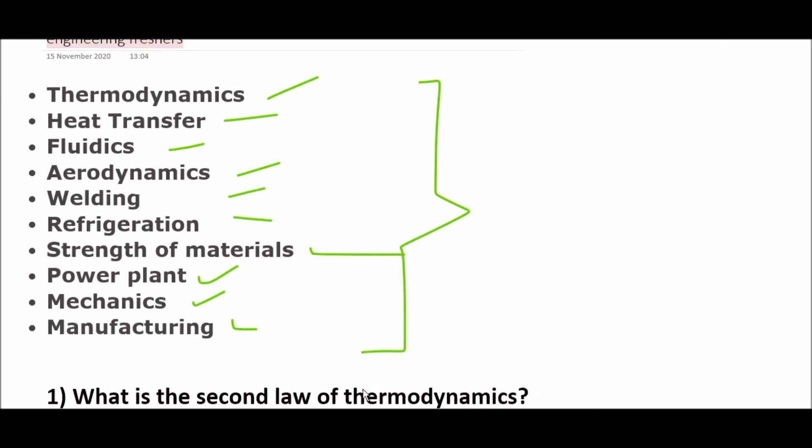First question: What is the second law of thermodynamics? The second law of thermodynamics depicts that the total entropy of an isolated system can never reduce over time.

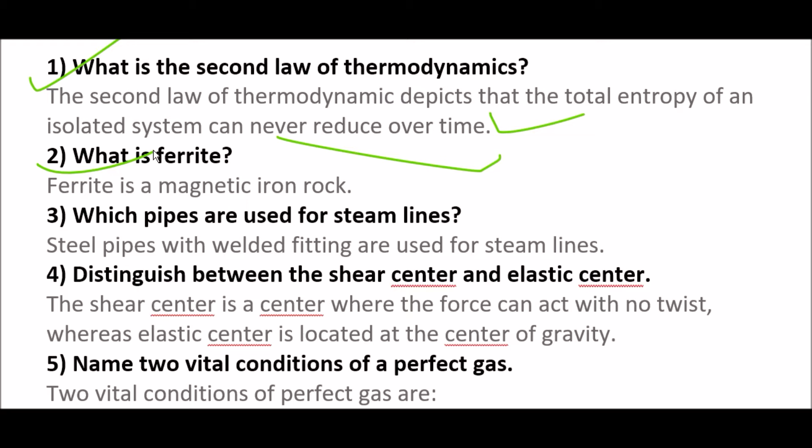Next question: What is ferrite? Ferrite is a magnetic iron rock. It's a ceramic-like material with magnetic properties that are useful in many types of electronic devices. Ferrites are hard, brittle, iron-containing, and generally gray or black, and are polycrystalline, that is, made up of a large number of small crystals. They are composed of iron oxide and one or more other metals in chemical combination.

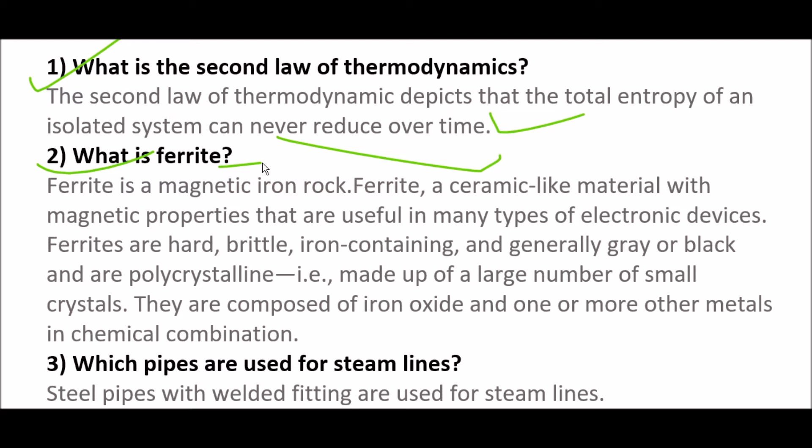Next question: Which pipes are used for steam lines? Steel pipes with welded fittings are used for steam lines.

Next, distinguish between the shear center and elastic center. This is a very important question. The shear center is a center where the force can act with no twist, whereas the elastic center is located at the center of gravity.

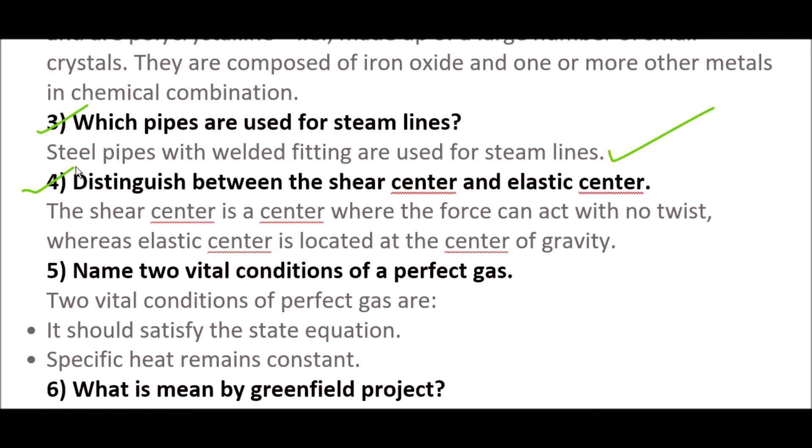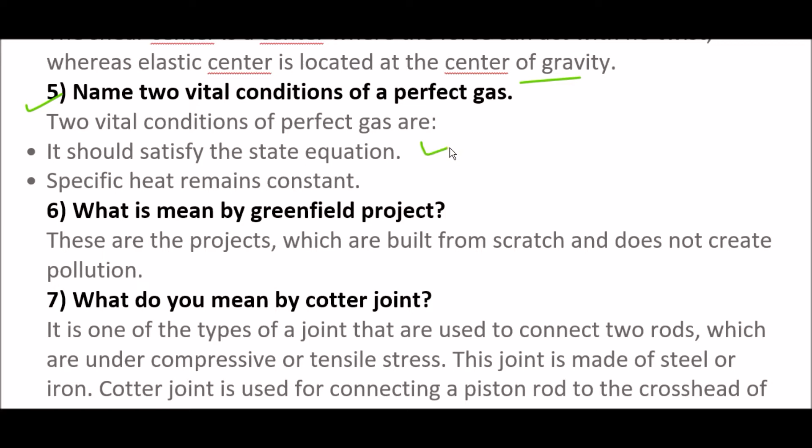Next question: Name two vital conditions of a perfect gas. The two vital conditions of a perfect gas are: first, it should satisfy the state equation, and second, specific heat remains constant.

Next question: What do you mean by greenfield project? These are the projects which are built from scratch and do not create pollution.

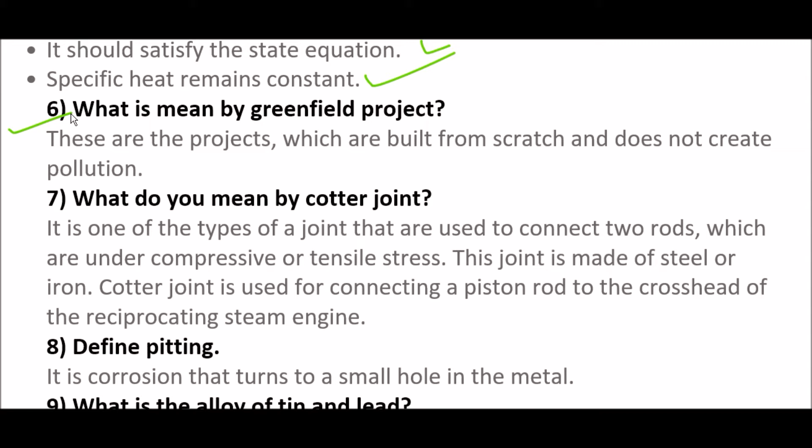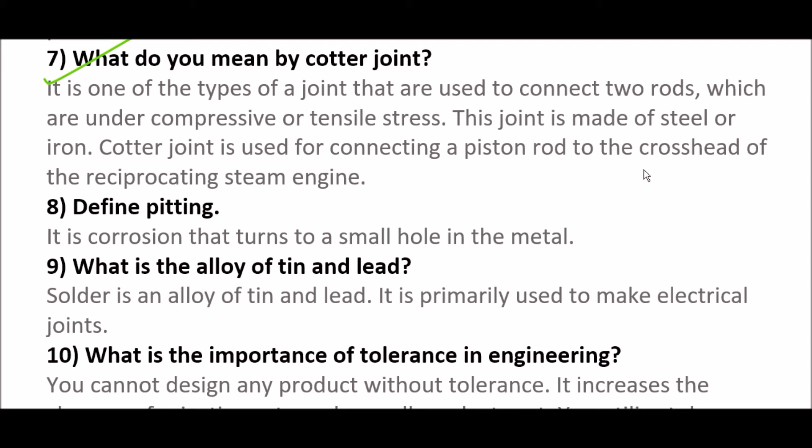Next question: What do you mean by cotter joint? A cotter joint is one of the types of joint that are used to connect two rods which are under compressive or tensile stress. This joint is made up of steel or iron. The cotter joint is used for connecting a piston rod to the crosshead of a reciprocating steam engine.

Next question: Define pitting. Pitting is a corrosion that turns into a small hole in the metal.

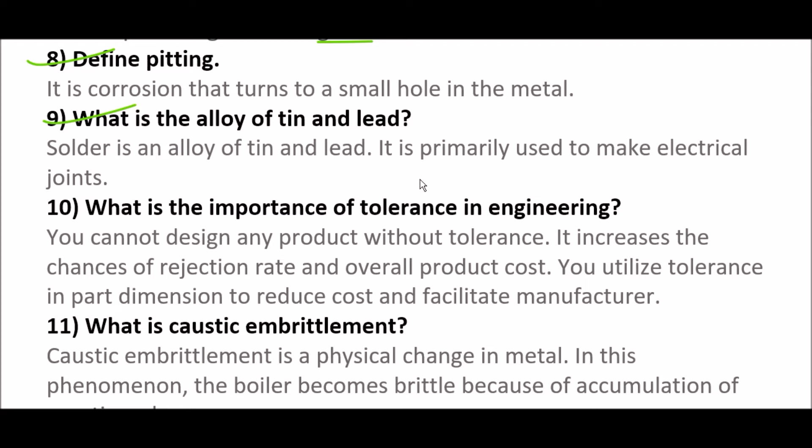Next, what is the alloy of tin and lead? Solder is an alloy of tin and lead, and it's primarily used to make electrical joints.

Next question: What is the importance of tolerance in engineering? You cannot design any product without tolerance. It increases the chances of rejection rate and overall product cost. You utilize tolerance and part dimensions to reduce cost and facilitate manufacturing.

Next question: What is caustic embrittlement? Caustic embrittlement is a physical change in metal. In this phenomena, the boiler becomes brittle because of accumulation of caustic soda.

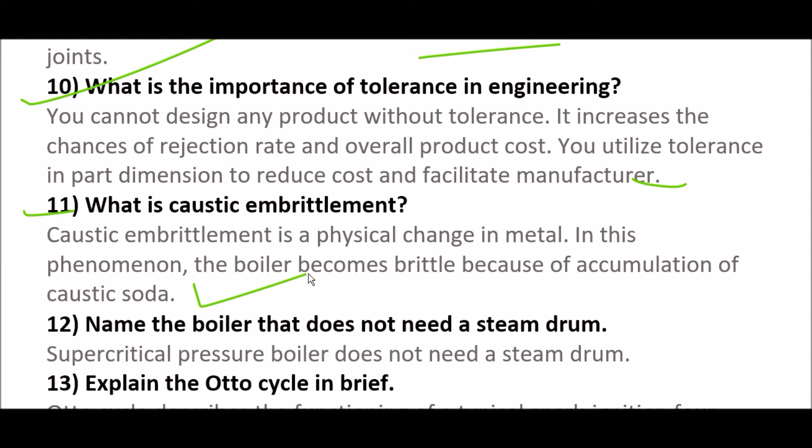Next question: Name the boiler that does not need a steam drum. The supercritical pressure boiler does not need a steam drum.

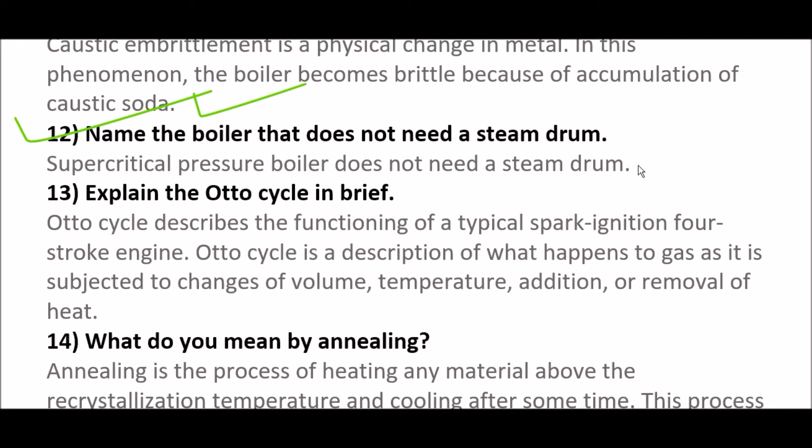Next question: Explain the Otto cycle in brief. The Otto cycle describes the functioning of a typical spark ignition four-stroke engine. The Otto cycle is a description of what happens to gas as it is subjected to change of volume, temperature, and addition or removal of heat.

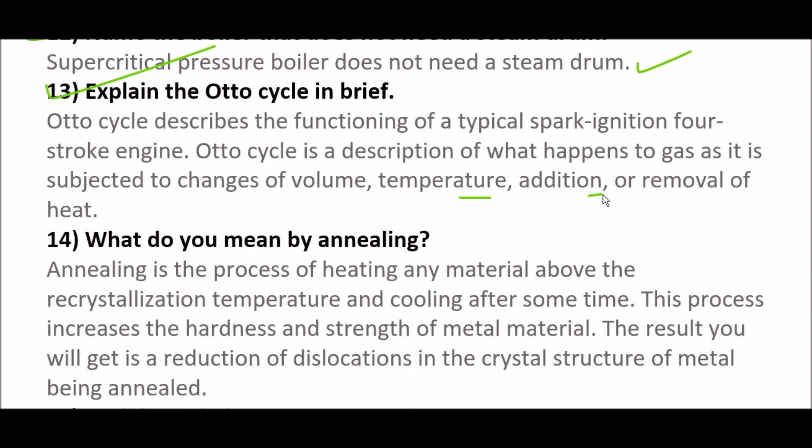Next question: What do you mean by annealing?

Annealing is the process of heating any material above the recrystallization temperature and cooling after some time. This process increases the hardness and strength of metal materials. The result you will get is a reduction of the dislocations in the crystal structure of the metal being annealed.

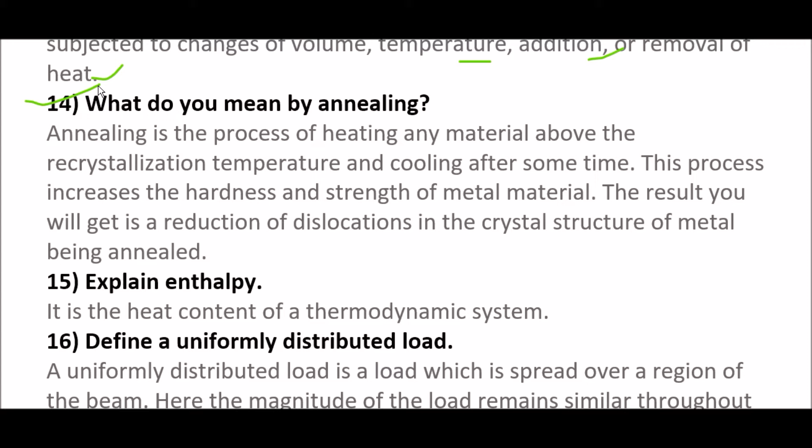Next question, explain enthalpy. This is a very important question. Enthalpy is asked a lot in MCQs and interviews too. So the answer is, it is the heat content of a thermodynamic system.

Next question, define a uniformly distributed load. The answer is a uniformly distributed load is a load which is spread over a region of the beam. Here, the magnitude of the load remains similar throughout the element.

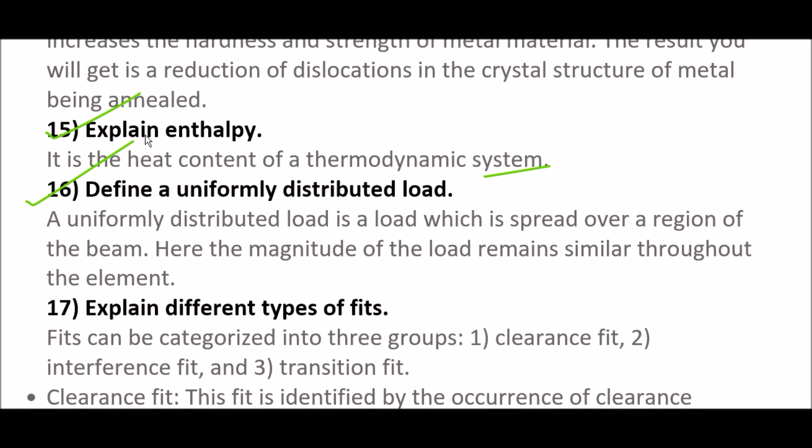Next question, explain different types of fits. The answer is fit can be categorized into three groups: first clearance fit, second interference fit, and third transition fit. Firstly, talking about clearance fit, clearance fit is identified by the occurrence of clearance between the two similar parts.

Next, interference fit. In this fit, the size of the mating parts is predefined to cause interference between these parts. Here, the hole tolerance zone is completely below the shaft tolerance zone. Third is transition fit, which is a compromise between clearance and interference fit. In this case, the tolerance zone of the shaft and hole overlaps.

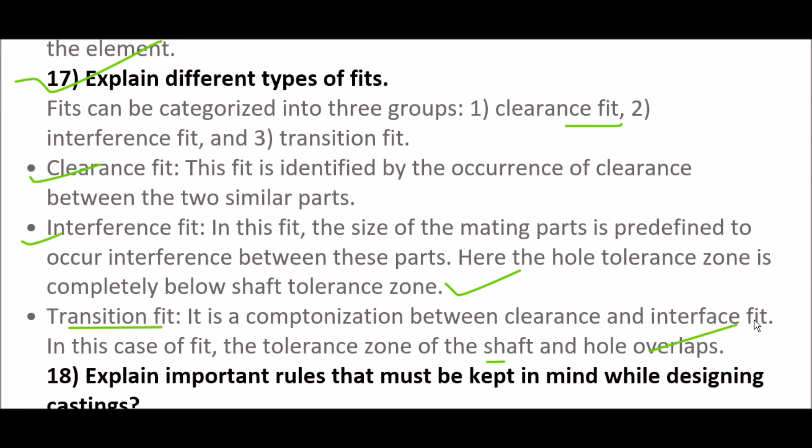Next question, explain important rules that must be kept in mind while designing castings. Following are the points you should keep in mind: first, keep section thickness uniform as much as possible. Second, sudden change in thickness should be averted at all costs. Third, design casting by keeping simplicity. Next, avoid large flat surfaces as too large spaces are difficult to create. And last, use a curved shape to improve the stress handling of the cast.

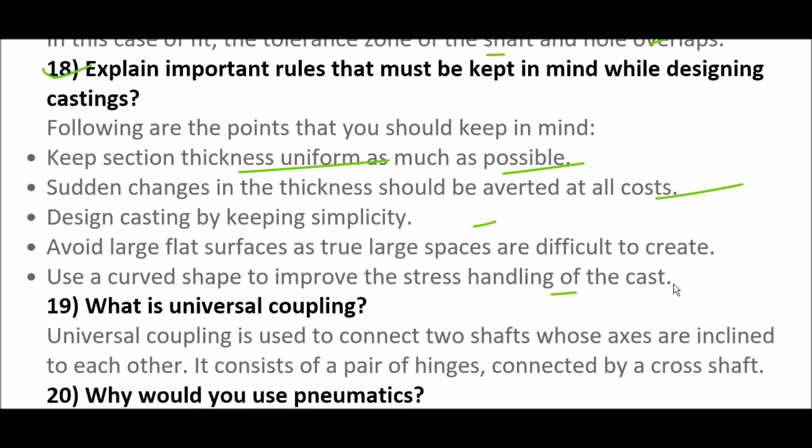Next question, what is universal coupling? The answer is universal coupling is used to connect two shafts whose axes are inclined to each other. It consists of a pair of hinges connected by a cross shaft.

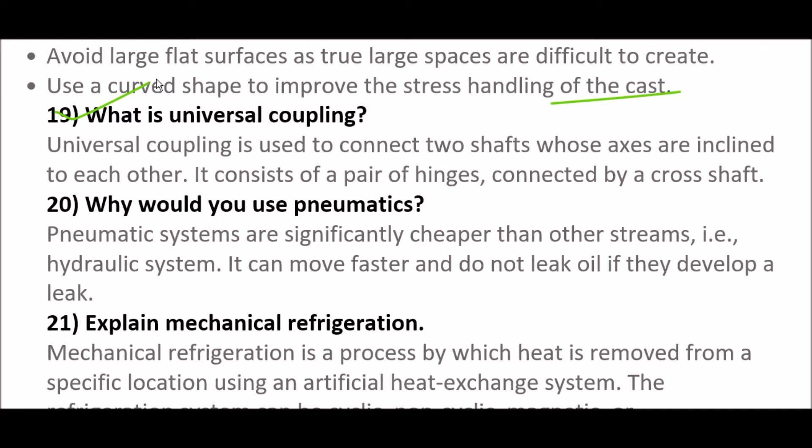Next question, why should you use pneumatics? The answer is pneumatic systems are significantly cheaper than other systems, such as hydraulic systems. They can move faster and don't leak oil if they develop a leak.

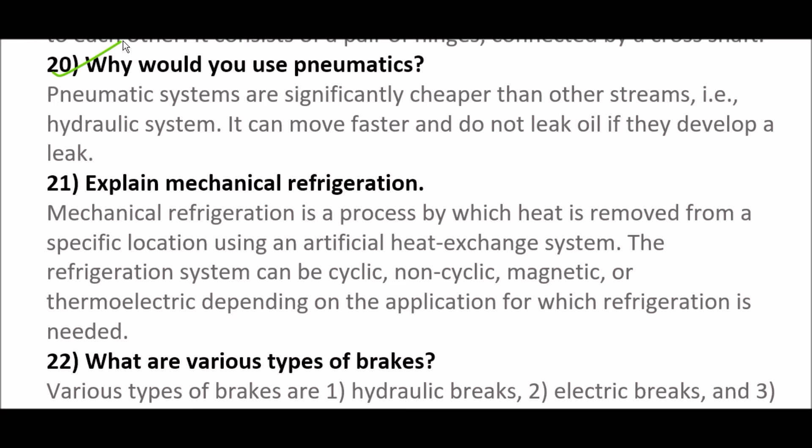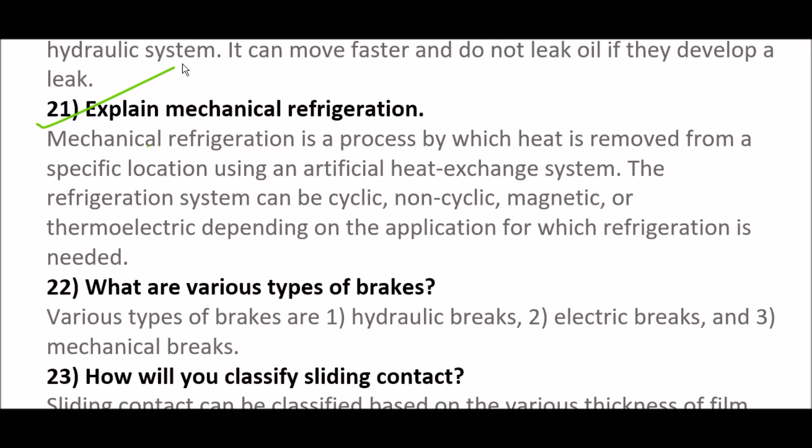Next question, explain mechanical refrigeration. The answer is mechanical refrigeration is a process by which heat is removed from a specific location using an artificial heat exchange system. The refrigeration system can be cyclic, non-cyclic, magnetic, or thermoelectric depending on the application for which refrigeration is needed.

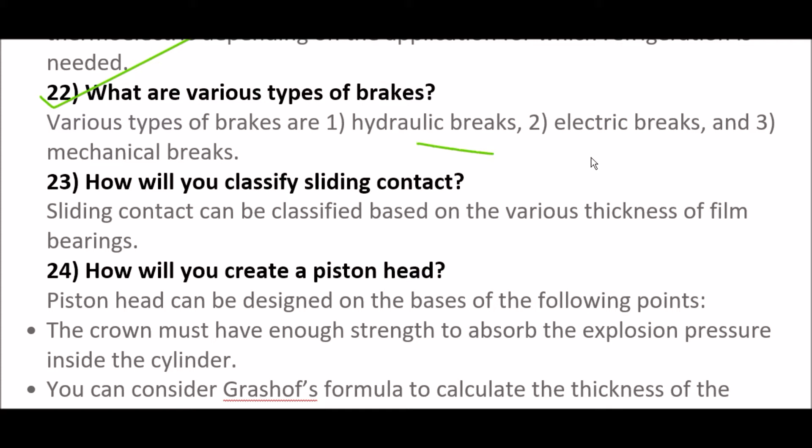Next question, what are various types of brakes? The various types of brakes are hydraulic brakes, electric brakes, and mechanical brakes.

Next question, how will you classify sliding contact? The answer is sliding contact can be classified based on the various thickness of film bearings.

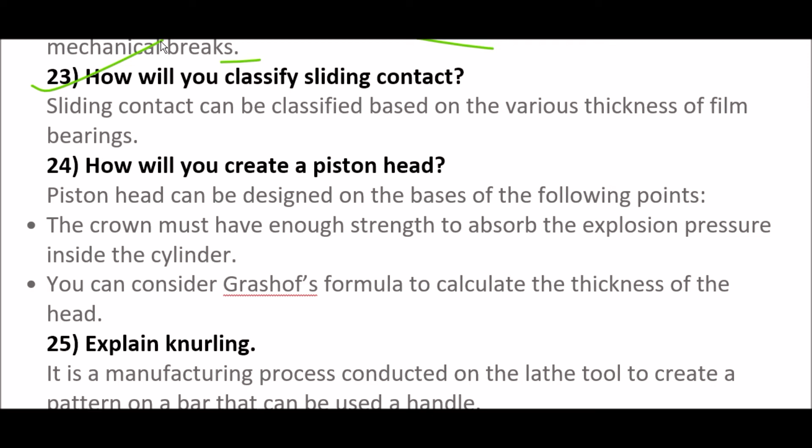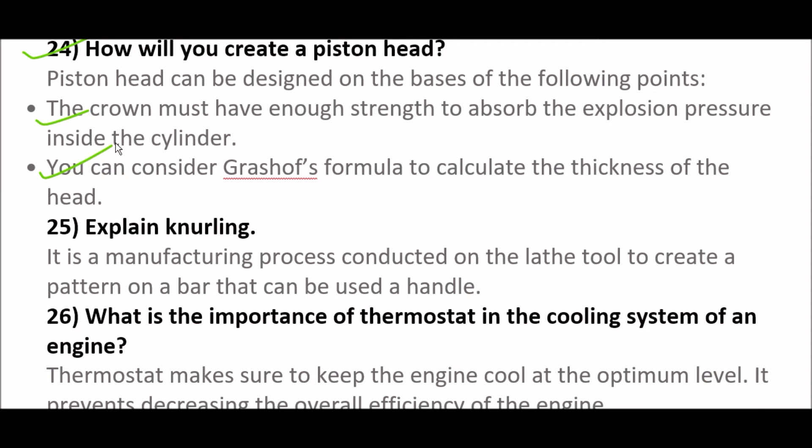Next question, how will you design a piston head? The answer is the piston head can be designed on the basis of the following points: first, the crown must have enough strength to absorb the explosion pressure inside the cylinder. Second, you can consider Grashof's formula to calculate the thickness of the head.

Next question, explain knurling. The answer is knurling is a manufacturing process conducted on the lathe tool to create a pattern on a bar that can be used as a handle.

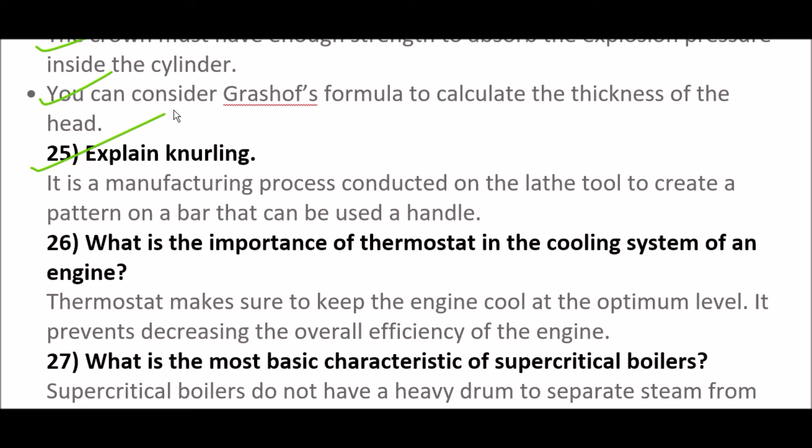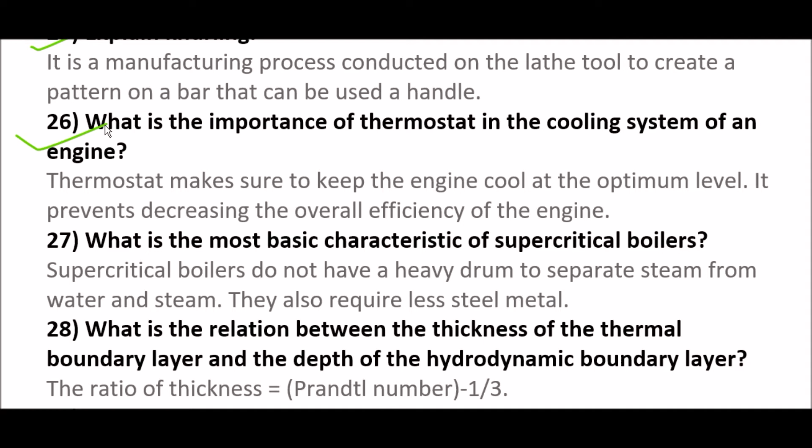Next question, what is the importance of a thermostat in the cooling system of an engine? The answer is the thermostat makes sure to keep the engine cool at the optimum level. It prevents decreasing the overall efficiency of the engine.

Next question, what is the most basic characteristic of supercritical boilers? This is a very important question. The answer is supercritical boilers do not have a heavy drum to separate steam from water and steam. They also require less steel metal.

Next question, what is the relation between the thickness of the thermal boundary layer and the depth of the hydrodynamic boundary layer? The answer is the ratio of thickness is equal to Prandtl number to the power of minus 1 by 3.

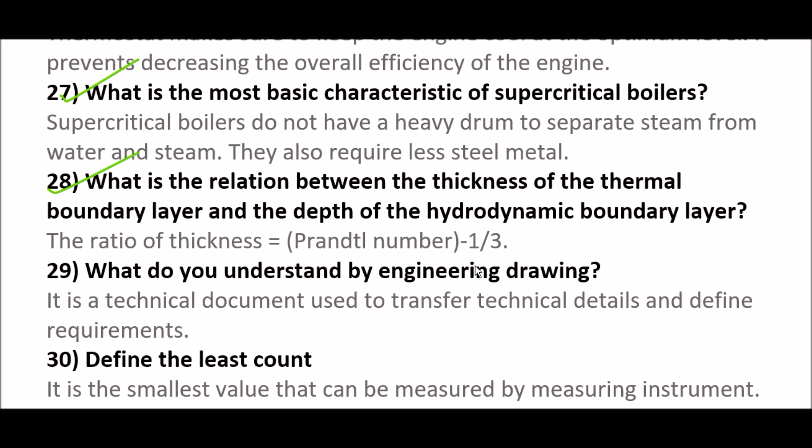Next question, what do you understand by engineering drawing? The answer is it's a technical document used to transfer technical details and define requirements.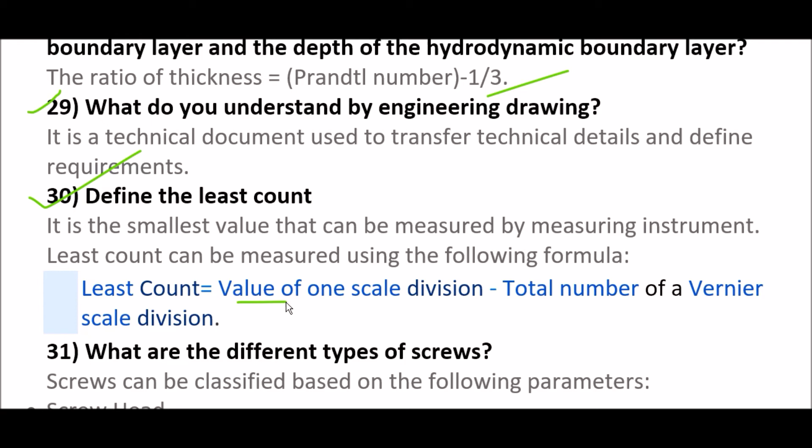Next question, define the least count. The least count is the smallest value that can be measured by a measuring instrument. It can be measured using the following formula: least count is equal to the value of one scale division minus the total number of vernier scale divisions. Just learn this formula, it's very important.

What are the different types of screws? Screws can be classified based on the following parameters: first, screw head; second, screw thread type; and third, screw drive type.

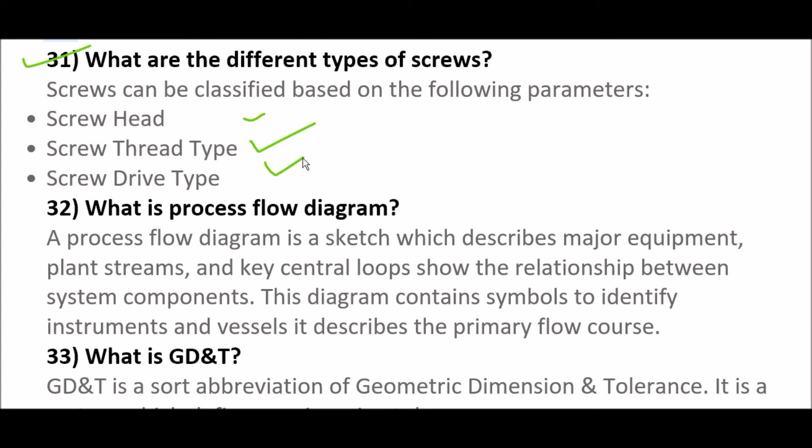What is the process flow diagram? A process flow diagram is a sketch which describes major equipment, plant streams, and key control loops, showing the relationship between system components. This diagram contains symbols to identify instruments and vessels, and it describes the primary flow course.

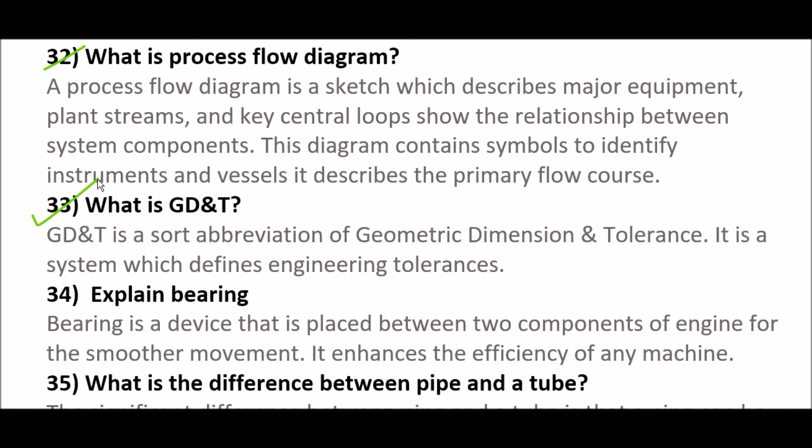What is GD and T? GD and T is a short abbreviation for geometric dimensions and tolerance. It's a system which defines engineering tolerances.

Explain bearing. Bearing is a device that is placed between two components of an engine for smoother movement. It enhances the efficiency of any machine.

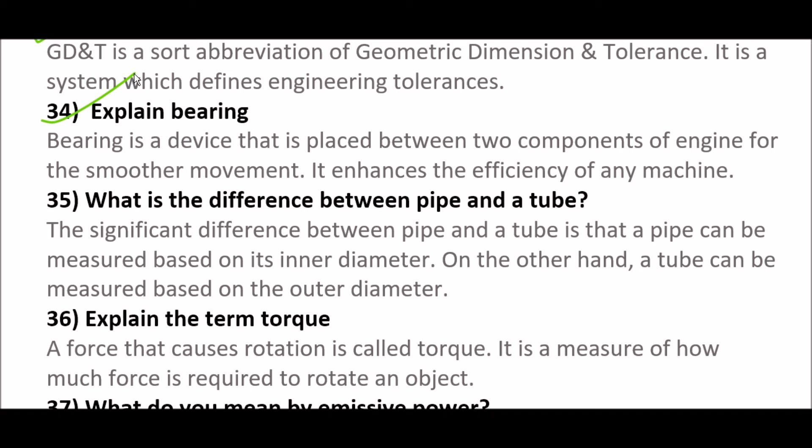What is the difference between pipe and tube? The significant difference between pipe and tube is that a pipe can be measured based on its inner diameter, while a tube can be measured based on its outer diameter.

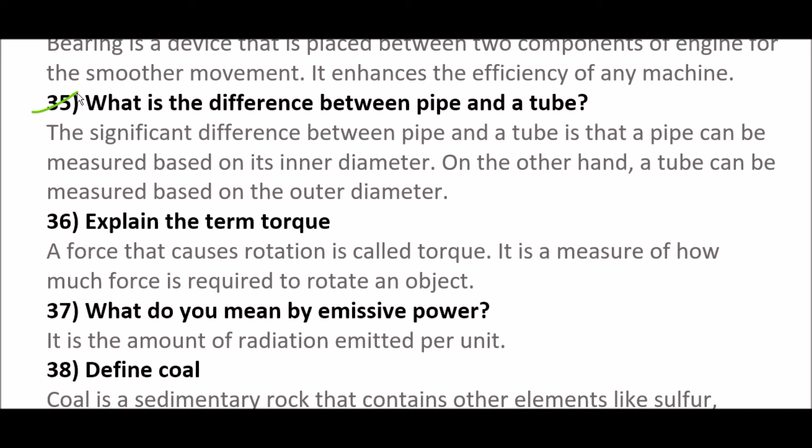Explain the term torque. A force that causes rotation is called torque. It's a measure of how much force is required to rotate an object.

What do you mean by emissive power? Emissive power is the amount of radiation emitted per unit.

Define coal. Coal is a sedimentary rock that contains other elements like sulfur, oxygen, chiefly hydrogen, and nitrogen. It's the most important primary fossil fuel.

Differentiate between total moisture and inherent moisture of coal. Total moisture in coal is referred to as the moisture of the bulk sample, while the moisture of the air-dried sample is called inherent moisture.

What does AFBC stand for? AFBC stands for atmospheric fluidized bed combustion.

What are the benefits of cycloidal gears? The primary benefits are: first, it has a wider and high power flank as compared to involute gears; second, the contact of cycloidal gears is between the concave surface and the convex flank, which reduces wear and tear of the engine; and third, there are no chances of interference occurring in cycloidal gears.

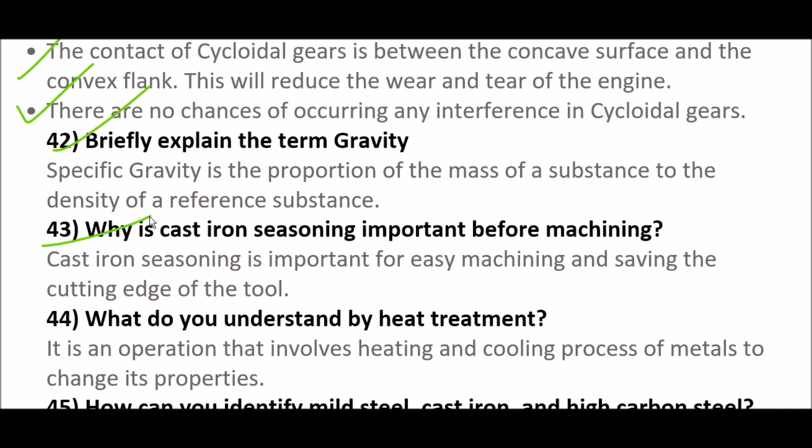Why is cast iron seasoning important before machining? Cast iron seasoning is important for easy machining and saving the cutting edge of the tool.

What do you understand by heat treatment? It's an operation that involves heating and cooling processes of metals to change its properties.

How can you identify mild steel, cast iron, and high carbon steel? You can identify these metals by spark. Mild steel gives medium and dense spark. Cast iron gives very thick and short flashes. On the other hand, high carbon steel gives long and thick sparks.

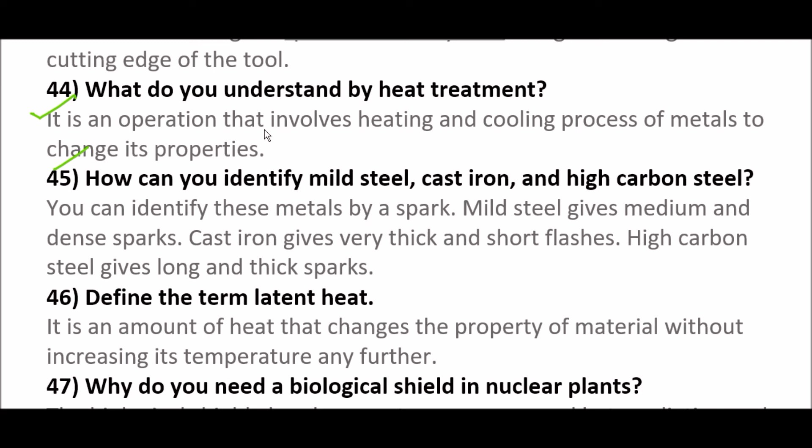Define the term latent heat. It's an amount of heat that changes the property of material without increasing its temperature any further.

Why do you need a biological shield in nuclear plants? The biological shield absorbs neutron, gamma, and beta radiation and protects living things. That's why you need a biological shield in nuclear plants.

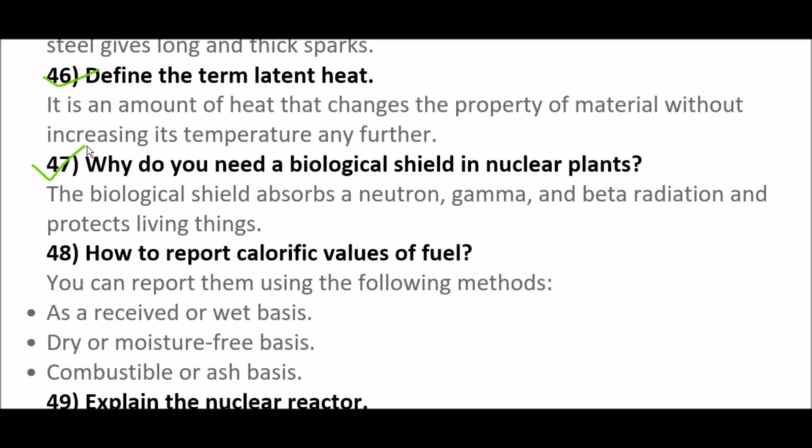How to report calorific values of fuel? You can report them using the following methods: first, as received or wet basis; second, dry or moisture free basis; and third, combustible or ash basis.

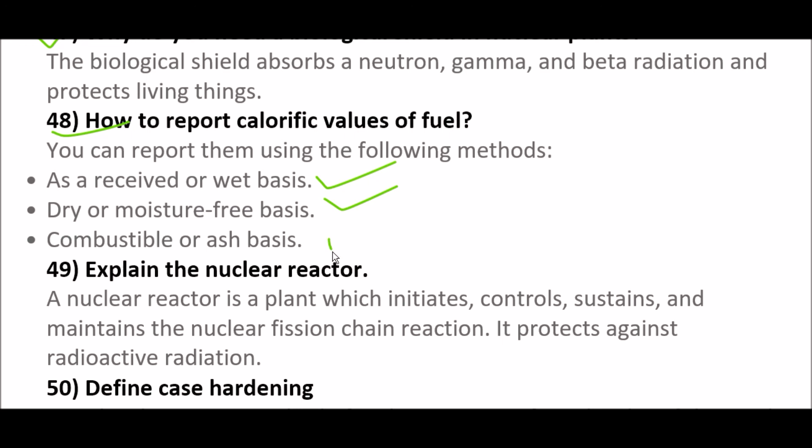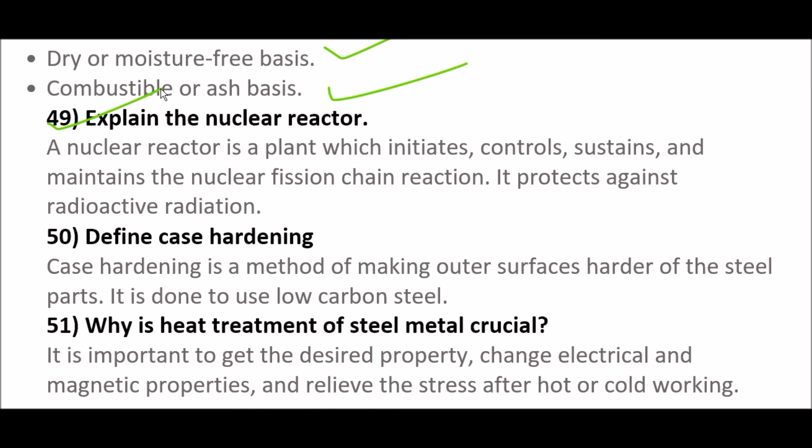Explain the nuclear reactor. A nuclear reactor is a plant which initiates, controls, sustains and maintains the nuclear fission chain reaction. It protects against radioactive radiation.

Define case hardening. Case hardening is a method of making the outer surfaces of steel parts harder. It's done using low carbon steel.

Last question of this video: why is heat treatment of steel metal crucial? It's important to get the desired property, change electrical and magnetic properties, and relieve the stress after hot or cold working. That's why heat treatment of steel metal is crucial.